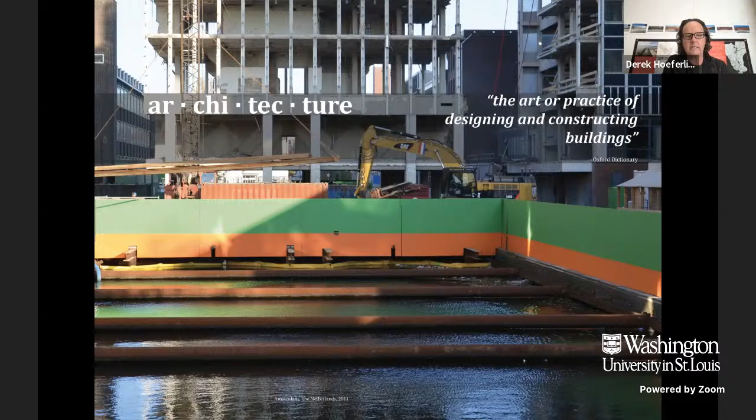Architecture itself, what I'm trained to practice legally to do, is the art or practice of designing and constructing buildings. But the double meaning of architecture, strangely and kind of insanely vague, is the complex or carefully designed structure of something.

This quote can almost seem like a threat to the discipline of architecture, but it really casts the net in a much broader way of what we think the term architecture means.

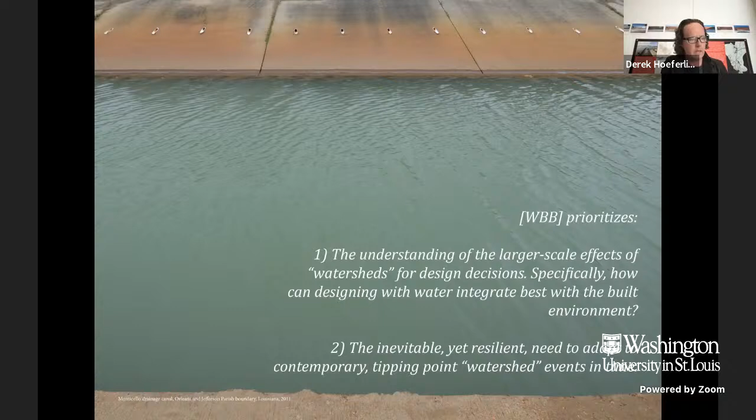So Way Beyond Bigness prioritizes the understanding of larger scale effects of watersheds for design decisions. Specifically, how can water integrate better with the built environment? And secondly, there's this inevitable yet resilient need to adapt to contemporary watershed events over time.

Way Beyond Bigness realigns both watersheds and architecture across multiple scales, from the site to the river basin, disciplines from ecologists to economists, narratives from the hyperbolic to the realistic, and venues from the academic to the professional.

Given our contemporary complex challenges, especially in relation to water, this cannot be done by one author or one architect. We need collaborations.

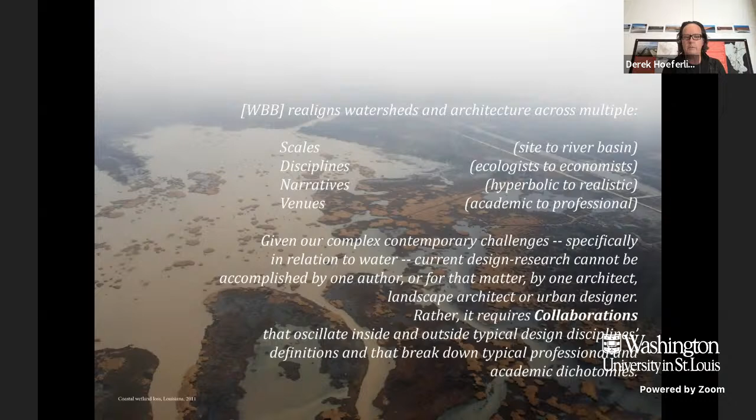I'm probably preaching to the choir, but these collaborations need to be different. They need to break down our typical professional and academic dichotomies, for instance.

But saying all this, a lot of the stuff I'll show today may come off as dire or pessimistic, kind of the world we live in right now, but it's really about opportunities and not crises.

We need to be much more proactive and not reactive. We need to think not just about what happens downstream, but where it comes from far upstream. And of course, still have to be pragmatic and hopefully optimistic.

So what I've developed in this book and in my research is a simple methodology, nothing unique, structured in three parts. The first is about analysis, but it's not just analysis, it's about appreciation. What does it mean to truly appreciate contexts and sites in different ways?

It's about synthesizing, but with synthesis comes the notion of speculation. That's where architects, landscape architects, and designers can cast a different way of thinking about things.

And when we collaborate, it's not just for the pursuit of collaboration or getting more grants. It's about catalyzing—how do we actually enact hopefully change, but maybe in different ways?

So the first part I'm going to talk about, which will be the majority of the work that I'll show you today, is this need for transboundary understandings—appreciating and analyzing.

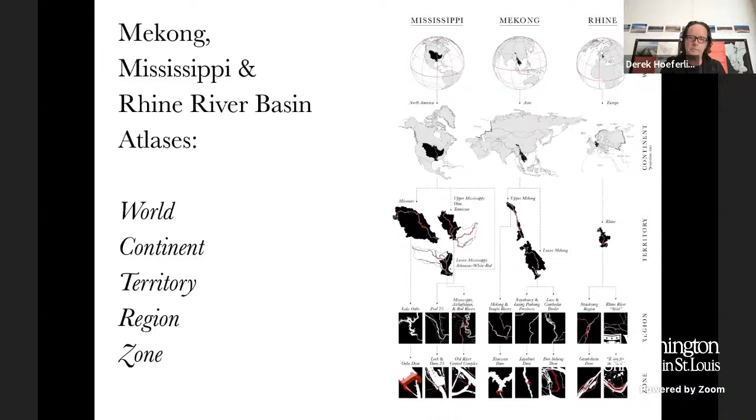So the first question is why—why these three river basins? I'm sure several of you have done deeper work than I have in these three river basins. But why the Mississippi, Mekong, and Rhine, other than personal reasons? The personal reason is that I live on the Mississippi.

I grew up here in St. Louis. I lived in New Orleans for a number of years. The Mekong, I love Southeast Asia, I love visiting there, I've been very fortunate to do so several times. And the Rhine, professionally, with my work in New Orleans, I worked with a lot of Dutch down there on water issues, so I have a lot of Dutch friends.

So those are the personal reasons, but the more questioning, research-oriented reasons—these are overly simplistic questions, maybe provocative—but you can make the argument that the Mississippi, because it's a 20th century engineered system, might be stagnating, both physically and possibly in other ways, socially and politically, if we go down that rabbit hole.

Accelerating: the Mekong is rapidly being developed, massive infrastructural projects, of course a huge amount of investment from countries upriver in the basin like China.

And then the Rhine, you could say, is adapting, or has been adapting, in terms of climate change policy, things happening especially in the Netherlands, but also upriver in Germany, France, and Switzerland. But those are maybe a little too simplistic.

The first thing you need to do when you look at this work, and what I've been doing, is understanding the management structures of each one of these. Obviously, all three have very different political structures, and they're managed differently. So these are, again, scale drawings of the three, the countries that happen within them, and what their management structures are in terms of river engineering and other types of watershed planning.

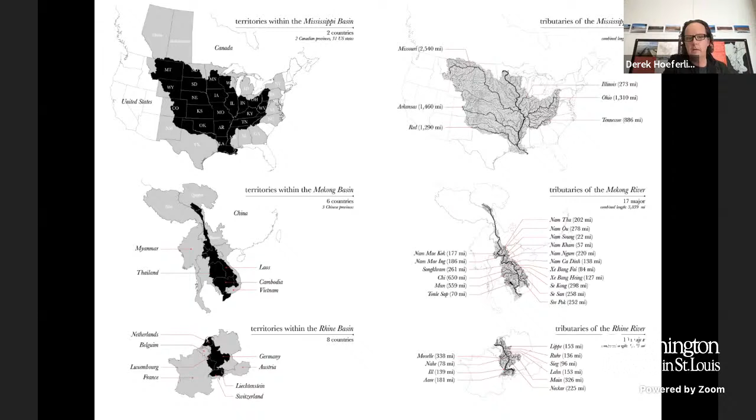And then I go into a series of comparative metrics that show, again scaled so you can see the difference, the territories of the three basins, the tributaries, water volume, and topographies. As you can see, the Mississippi, especially the main stem, is far less than the Rhine, but even more so the Mekong, which goes up into the foothills and the Himalayas and into Tibet.

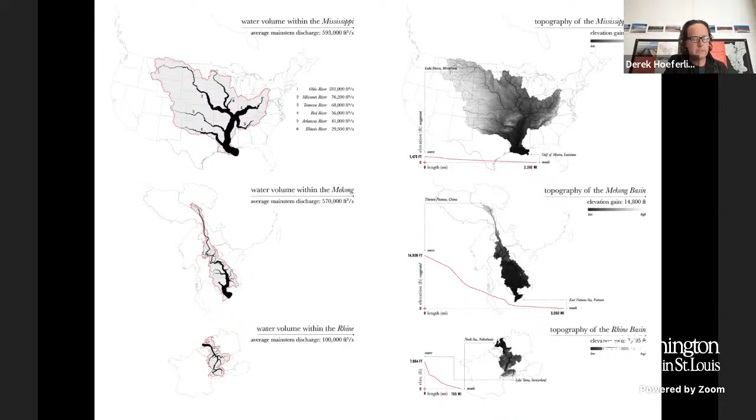So what I'm going to go deeper into today is one of the three. I typically talk about the Mississippi River Basin a lot—I don't want to say I'm getting tired of it, but usually the context of my talks is St. Louis or New Orleans or other parts of the watershed. But the Mekong is quite fascinating.

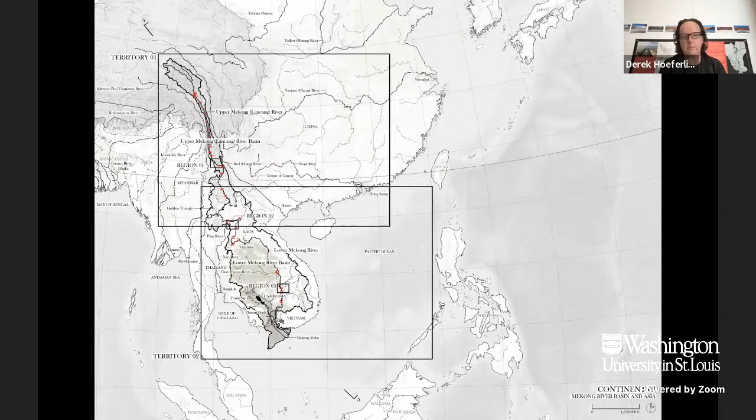So with those plan drawings, we've been constructing a series of correlating sections, and these are all orthographic drawings, which is a typical tool not just of architects drawing plans and sections of buildings, but also engineers. So this is maybe a critical way of looking at how we tend to draw these things.

So the point is that these rivers maybe aren't as river-like as we think, especially when drawn through an infrastructural lens. More specifically, these red cascading things you see are the dams that have been constructed, especially in China and Yunnan province, and the dashed ones are the planned ones. This is a big deal happening in the Mekong right now—serious ambitions for predominantly hydropower, but also water control.

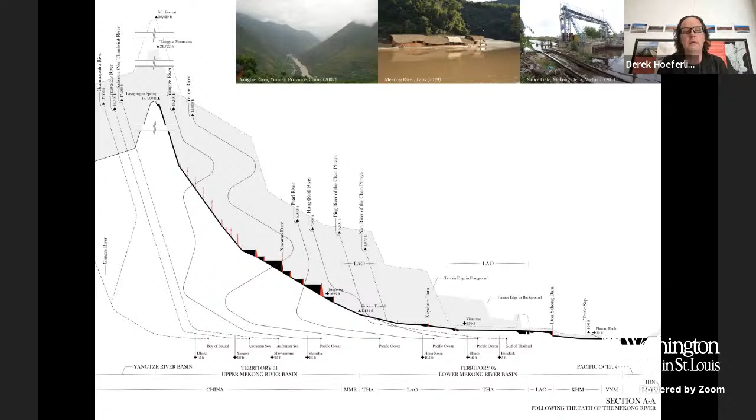And then the next scale in is the territory—so this is the upper Mekong River Basin. This photograph is at the Golden Triangle, where Myanmar, Laos, and Thailand come together. Here you can start to see more clearly where all the dams are located, the thinness of it, and this funneling of a vast amount of water, and how much power that can become for urbanized areas around it, which you might not be able to see.

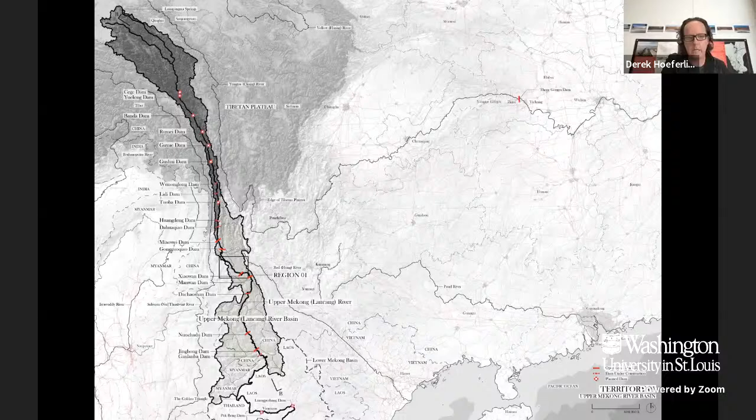There's a lot of really light red, delicate lines across this map—those are transmission lines, showing the beginning understanding of how these dams being constructed are designed to export power thousands of miles away to places like Guangdong province in China.

And then the next section through that—as you start to go in, you can see these red lines coming out of those dams, showing the names of the dams, the power, and where they're going—for instance, the West East Electricity Transfer Project, which gets this energy to large urbanized areas in China.

Moving into the next scale, the first territory is the region. This region specifically is where the Mekong and the Yangbi rivers come together towards another dam. This photograph is of Dali, up in Yunnan province, which technically is not in the Mekong River Basin, but there's a lake in the background of this photo, Erhai Lake, which is quite important—when you look at this plan, you can see these two rivers coming together down to the Xiaowan Dam.

As a result of these dams, as you all know, these giant reservoirs are created behind them, which do all sorts of things environmentally, ecologically, et cetera. But when the volume of water becomes so intense, that reservoir in the Yangbi River is actually backing all the way up, potentially even to Erhai Lake and Dali. So this backwater effect happening to very historic places like Dali could be transformative.

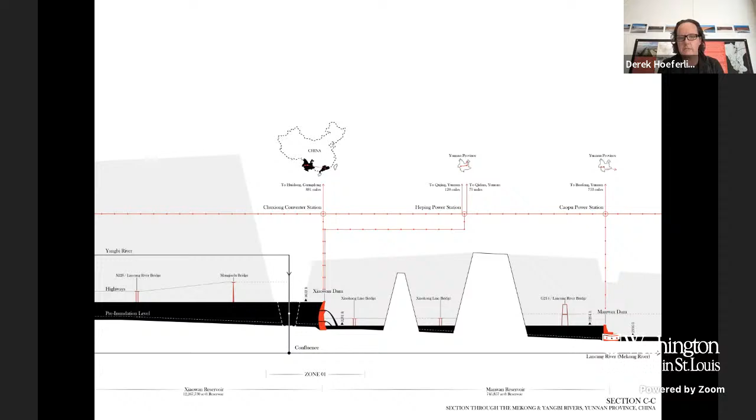And then where it's going out to, specifically which provinces it's heading out to. What's amazing is all this information is publicly available, which at first you think might not be, but this is all done from serious mining by my research assistants of GIS data sets and cross-referencing it.

So it's all there. This is the one photograph I did not get to take, so this is from International Rivers actually. I have not been able to make it up this far into China. It's quite intense to get to these parts.

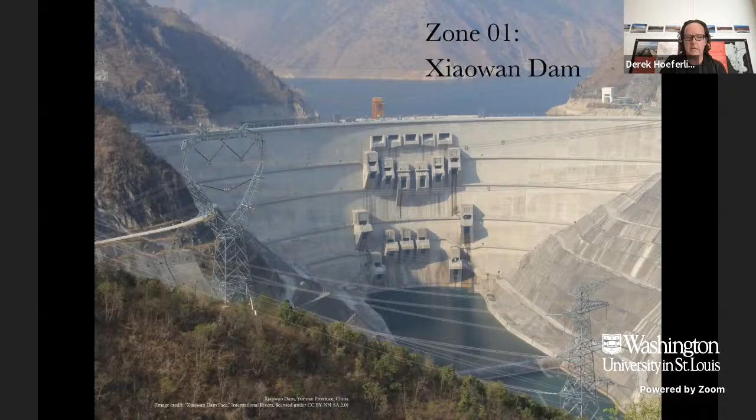So this is kind of what the scale of these dams are, and then here's the plan of it. When you zoom in more, you can see there's a white dashed double line - that's the former path of the Mekong. The black with the bathymetry underneath it shows the reservoir that's being created. The red curved line is the double arched curved construction of the dam, and then other things like the switching stations that are part of the power generation too.

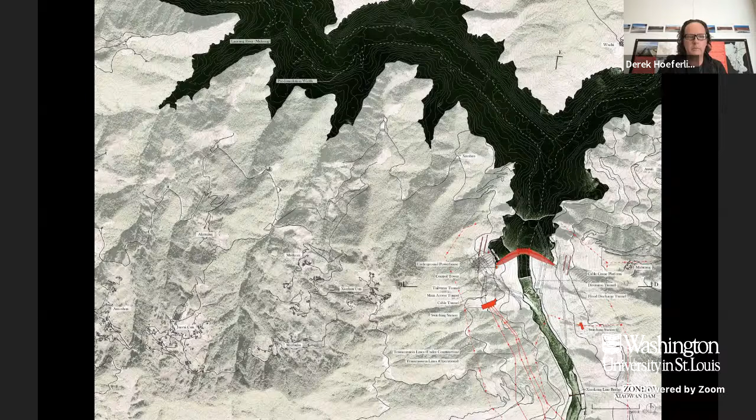These are two sections - one's cut looking back towards the dam of that photograph you just saw, and then even the transmission lines showing how that becomes a real new form of the built environment, just something we take for granted, power lines and transmission lines, but the feet to do those and how those alter the landscape, and then a cross section showing the reservoir.

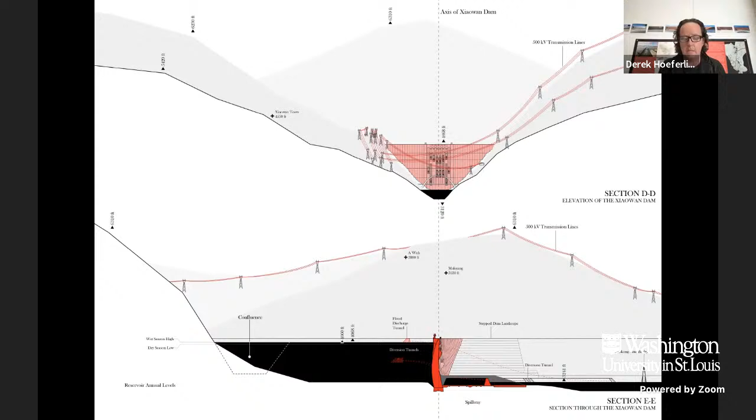And so just that giant step, maybe just in the simplest terms, the Mekong has completely changed for the foreseeable future. So that's the first territory.

The second one is moving into the lower Mekong Basin, where things radically change geographically, geomorphologically, climatically, et cetera. Then you can see in the icon the two smaller zones that we've been looking at.

Again, the very different context down in the bottom part - for those familiar, is the Tonle Sap Lake, the part in Cambodia where during seasonal dry and wet conditions, during the wetter times, the Mekong actually reverses its flow naturally and backs up and fills up this giant bladder, becoming one of the most important fisheries in the world. The jury's still out, but conventional wisdom is these large dams far upriver are completely altering that pulsing of water, threatening the future viability of not just the entire Mekong Delta, but the Tonle Sap region as well.

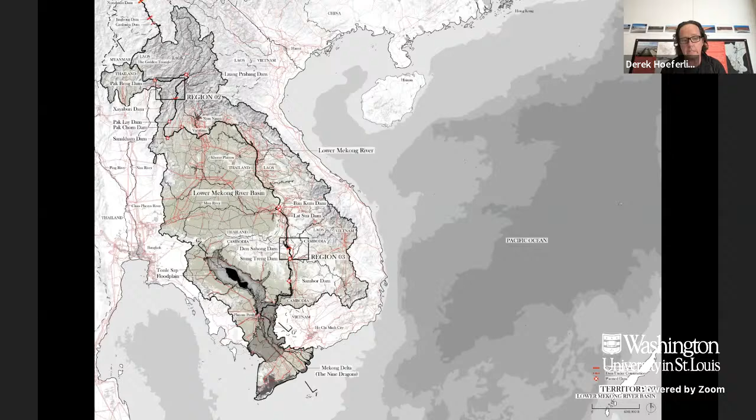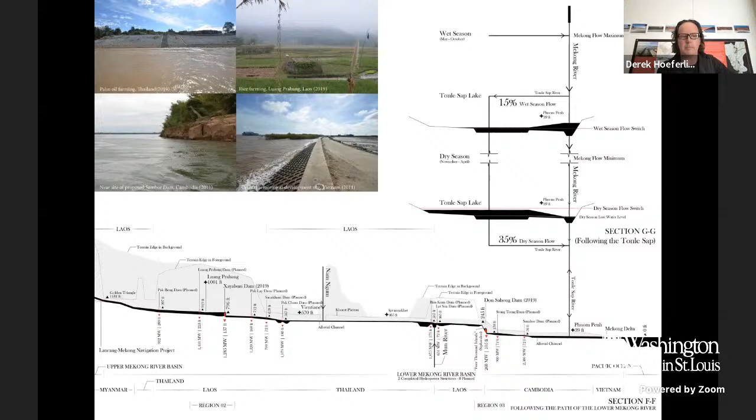The reservoir created by the already constructed Xayaburi Dam, the new roads, and then in the upper right is one of the relocated communities. So where the dam was, where the reservoir filled it up, there's been a state-funded program to relocate people.

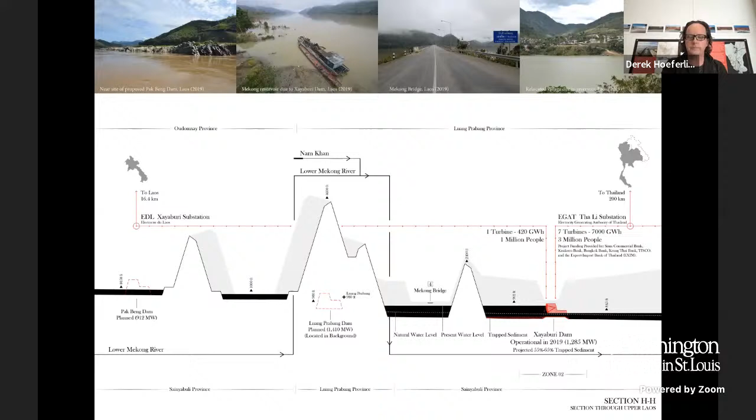What kind of social services and all that are part of it is a question. And then the section through those parts. And then this is the dam.

I was fortunate 2 years ago on one of my trips to be escorted by the Mekong River Commission and the Minister of Mines and Infrastructure from Laos to go to Xayaburi Dam. This is technically the only place you're allowed to take a photograph of it.

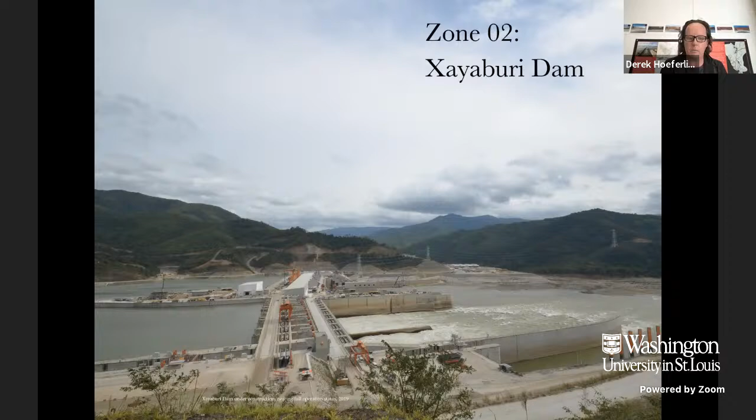This was before it became fully operational in 2019. So it's a run of the river dam. It's not nearly as big, of course, as the Cascade Dam, Xiaowan, but it's still drastic. It's the first main stem dam on the Mekong in Laos, at this lowest portion. So it was quite fascinating to be there while it was still under construction.

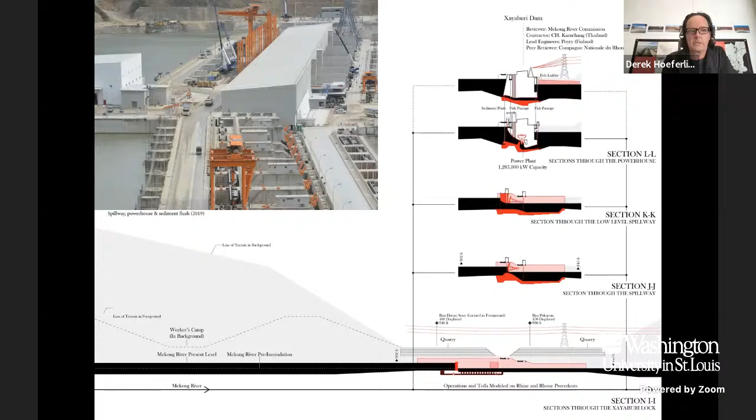But the Mekong River Commission went back and reviewed it, and they had to put a fish ladder and a sediment sluice back into the design and construction of these. The question is, there's never been a fish ladder or a sediment sluice that's been tested at the scale of what's going through the Mekong River, the amount of fish that are going through. This is not your salmon ladder up in the Columbia River in the Pacific Northwest. This is a gazillion amount of fish that are going up and down river. So the jury's out on whether these will even work.

But what's really special about this part of the Mekong River is this is where the remaining few dozen of the Irrawaddy dolphins are. If any of you know about the Irrawaddy dolphins, they're a dolphin that can live both in salt and fresh water. So this is thousands of miles upstream. There are these amazing dolphins. There used to be many, many thousands of them, but they were

eradicated by people like the Khmer Rouge. But so anyway, this is a very ecologically sensitive part of the river. And there's a dam that's finishing construction, the Don Sahong Dam, which is a kind of a diversion dam. So luckily they didn't kind of decapitate the whole part of the river right here.

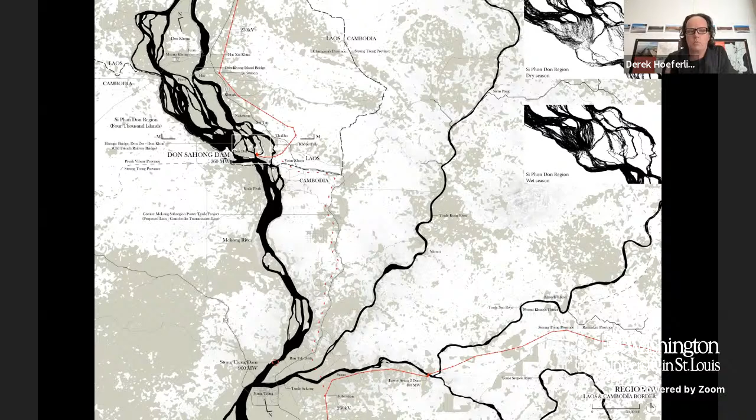But this is where all the higher part of the river comes through these series of cascading waterfalls. It's called the 4,000 Islands region, and then drops down. In the upper right, you can see what it's like in the dry season and in the wet season. So a radical pulsation of water comes through here.

Here you can see the photographs in the upper left. The middle photograph shows a tree. So this is when I was there during dry season. And you can see the roots that are just kind of pushed over, many, many years by the force of the river. The one on the left is a former river level gauge built out of stone in Cambodia that would have been built probably by the French.

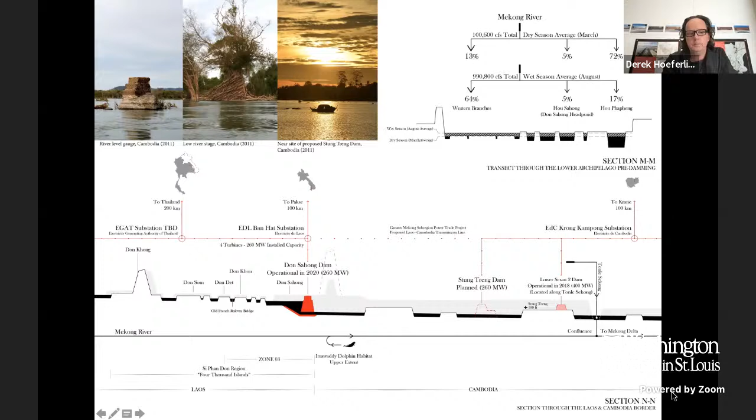And then the explanation of where that power is going, for instance, in Thailand. And this is a picture of that region and the low water level. So in the wet season, this right here, you'd be underwater. That's how much volume is ripping through this portion of the river.

And I really like this drawing because it just gives this kind of amazing braided view of this region. So the Mekong at this point is not just a river as we typically know it, but it just spreads out in so many directions. And the bottom part of the image is where it then spreads out and becomes the really big Mekong that we know. But on the right is where you can see the dam construction. So they've diverted it, and it's meant to take all this power.

Since I've been there, I haven't been there in over a decade, a lot of development has happened here. It's a bigger tourist destination, a lot of development pressure.

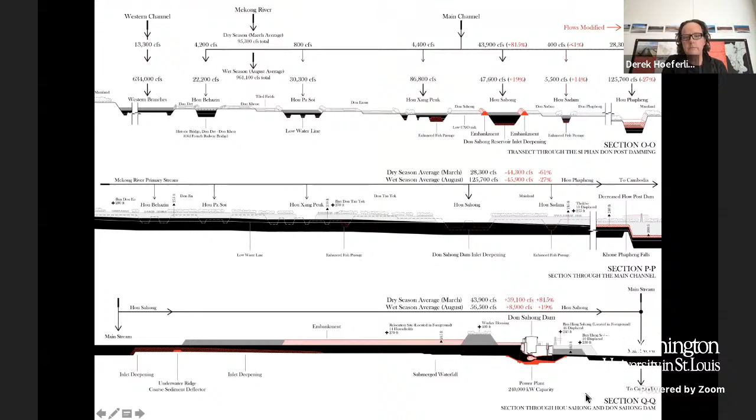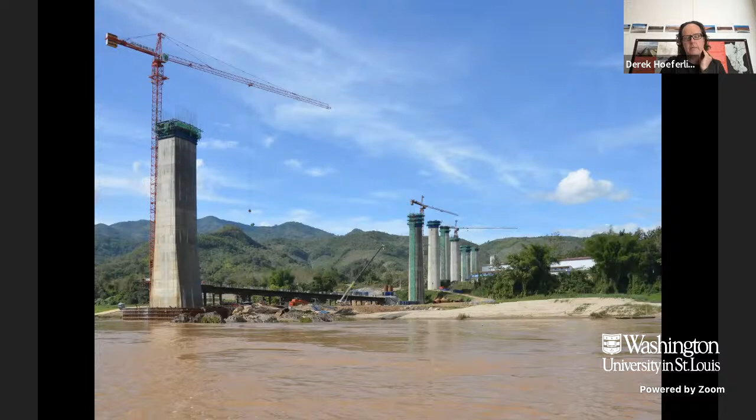This is a place called Las Vegas, a huge casino special economic zone at the Golden Triangle in Laos, on an island run by a Chinese company.

There's an essay that the members of the Mekong River Commission agreed to write, explaining the economic and environmental balancing act they have to do with the development of the Mekong.

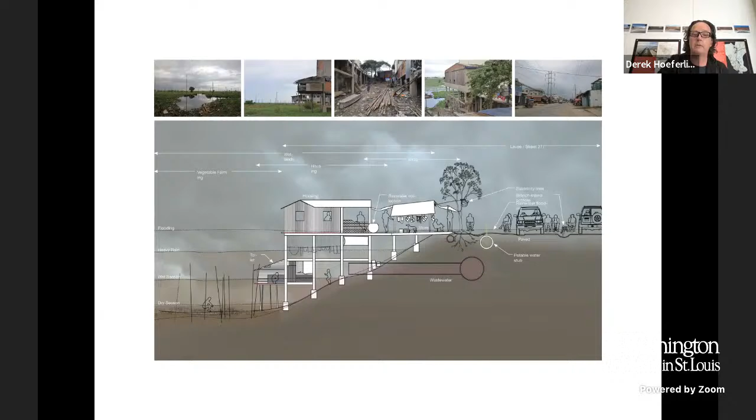And then one about adaptation by Shelby Doyle, who teaches at Iowa State, an architect, where she did a Fulbright studying things like the photograph I showed, how the vernacular architecture is doing a lot of these things, but they're at threat based on increased changes.

I was the person that helped me get through these trips, and I've met before, Dr. Duong Van Ni, an agricultural scientist at Can Tho University. He wrote an essay about his monitoring kits that he works with local farmers on, going out with low-tech instruments to test the saline levels.

These are drawings that we did of his work. My research assistants redrew the stuff that he did, tying in together his important work with our work.

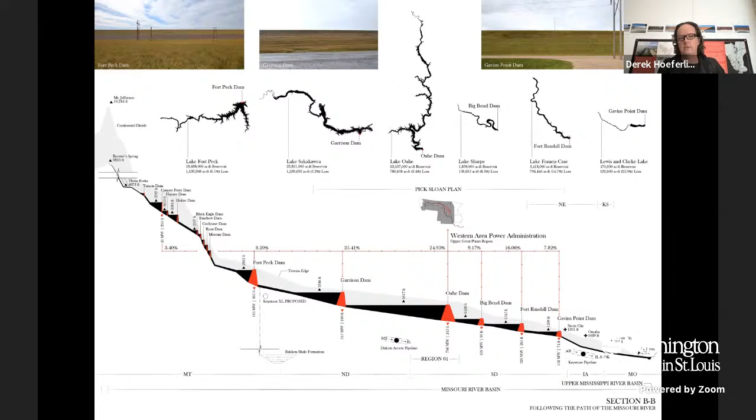And then real quickly, I'm going to show a couple images similarly of the Mississippi. This is the Missouri River Basin, which has those big dams, the Fort Peck Dam, and the massive hydropower project done last century with the Pick-Sloan plan, and the reservoirs created because of those. So you could say the Mekong is following in the footsteps of Missouri and Mississippi management, but here the inundation of lands were much more catastrophic for places like tribal reservations, for instance.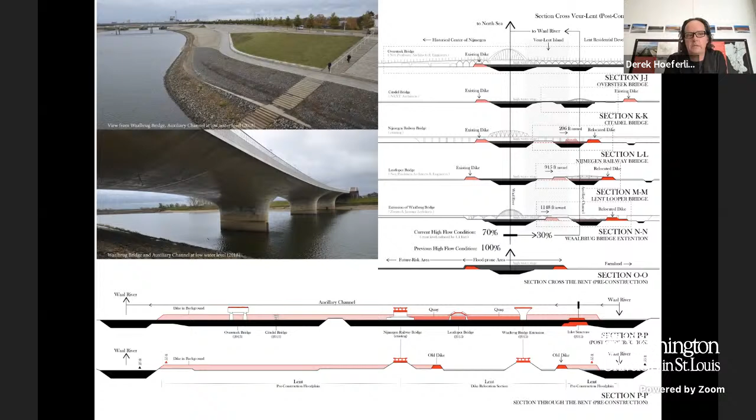And this is the town of Nijmegen at the German border, where they're doing these incredible projects, making bypass channels to allow floodwaters, but also to think about drought conditions too, making these much more publicly amenable spaces. So I'm going to wrap up with this portion of the talk, and then move into the current work in Colombia with the grant.

We got another 10 or 15 minutes, hopefully, for me to talk.

But there are clues with all this, and there are possibilities. This is me taking my students out several years ago in the backwaters of the Mississippi with my friend Chuck Theiling, who works for the Corps of Engineers.

There are clues to replenish, to redistribute, to reboot. So that gets into the speculation section, the need for transboundary watershed architecture.

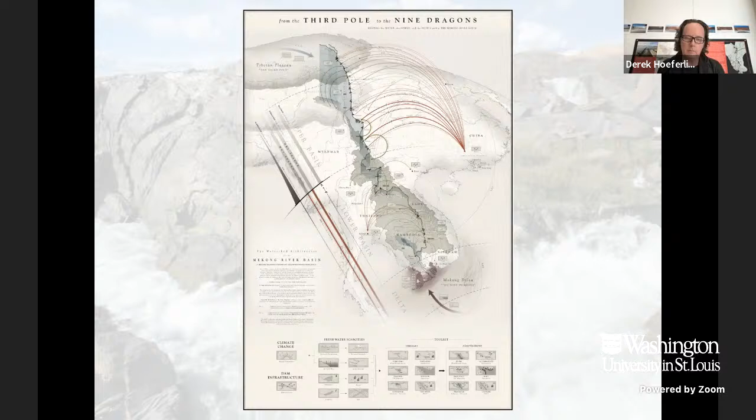So back to the Mekong, this was, Michael mentioned, a design competition I did a few years ago with Jess Vanacek and others. This was for asking about speculative ideas about dealing with water scarcity of all things, and it was a resiliency competition. So I thought this would be a great opportunity to do a speculation on what would it mean to think about a transboundary relationship of the Mekong in relation to power and water scarcity.

And so we did this really dynamic map that mapped out all the existing power generation and how it's being exported out primarily to China, but also showing the consequences of blocked fish migrations, disrupted flood cycles and drought cycles, suppressed sediments and nutrients.

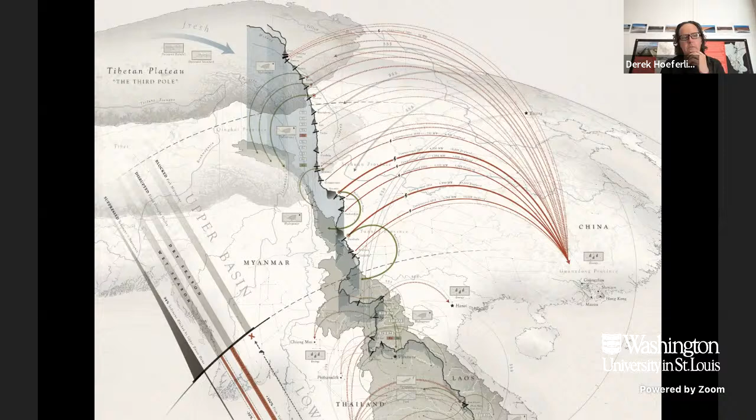And this is at the upper basin. And then this shows the lower basin.

We wrote a manifesto about transboundary resilience, but really it boiled down to the threats of climate change, coupled with the issues of dam infrastructure, creating freshwater scarcities, which brings threats, but then we need adaptations to those threats. I won't go much into detail given time, but it's basically about how do you work with the water and live with the water as opposed to fight it and control it.

Back in the Mississippi, a series of drawings I did with my colleague Ian Caine a number of years ago, where we were speculating on the future migration patterns of the United States and North America, specifically in relation to water. This bottom map is us speculating on where the water will be, and won't be in the American Southwest. There's going to be a lot of it here in our region, in the Mississippi and Missouri. However, it might be very mismanaged right now.

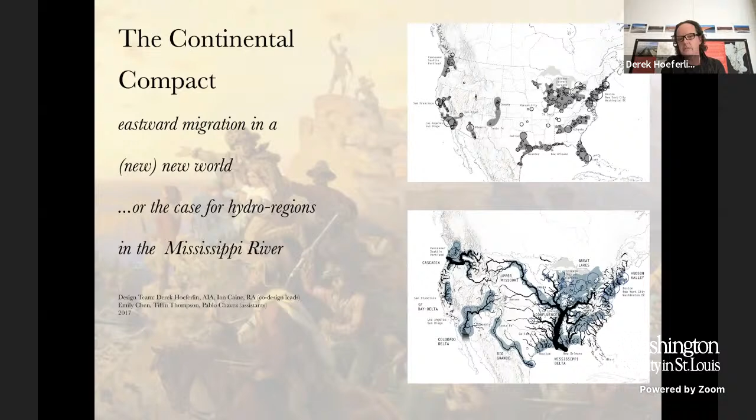There will be a lot of it. There will also be droughts too, but thinking about where's the future place to be, probably where the water is.

And then we proposed this idea of an eco-industry toolkit. There will be big industry in the future of the Mississippi. That's not going away anytime soon. Of course, we have big agriculture and big industry, but what does it mean to be much more sustainable?

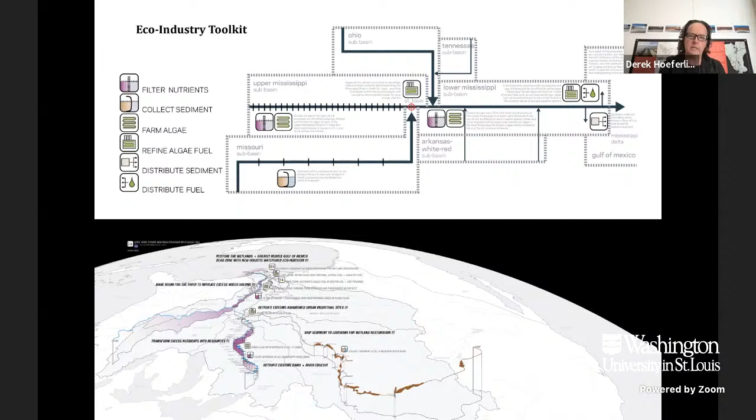How do you think about wastes as resources? Instead of nutrient overloads being negative, how can they become sequestered and used for things like algae or wetland sinks? What does it mean to rethink the distribution of sediment and allow it to replenish wetlands or be brought back to the Delta of Louisiana?

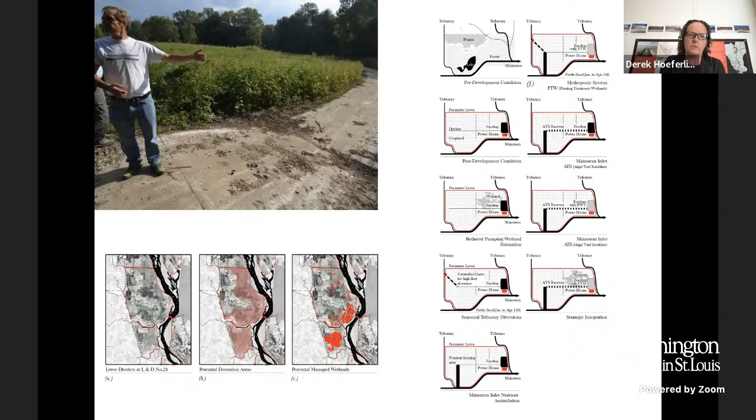And my friend Chuck Theiling with the Corps, I mentioned he's doing these things on a much more local scale, working with local farmers to turn back tiled farmland into nutrient sinks and even use algae mats and other things like that.

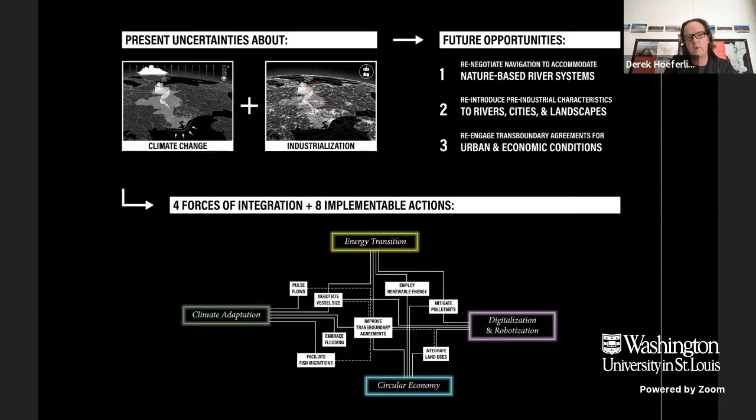We've done a speculation for the Rhine that talks about recentering the Rhine as a circular economy in the future for Europe. What does it mean for the energy transition, climate adaptation? And of course, this is very complicated given the current geopolitical context that not just the Rhine, but all of Europe finds itself in right now in terms of energy.

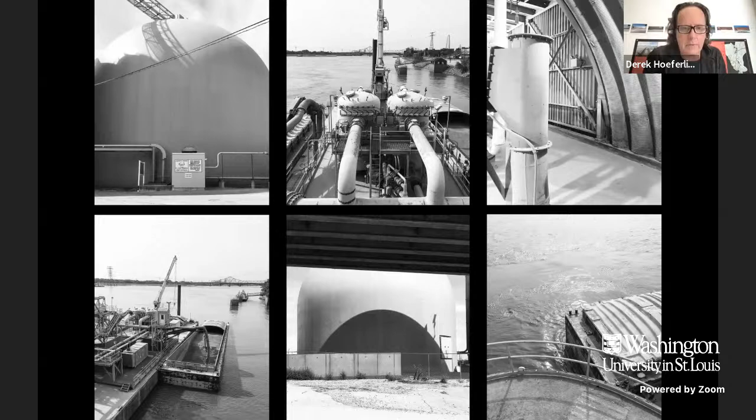So finally, Collaborate and Catalyze. I'm going to flip through this project really quick because I want to get to the Colombia project, but I did a project with students a couple of years ago on a barge. We were able to get access to Continental Cement Company, which is on the North Riverfront here in St. Louis.

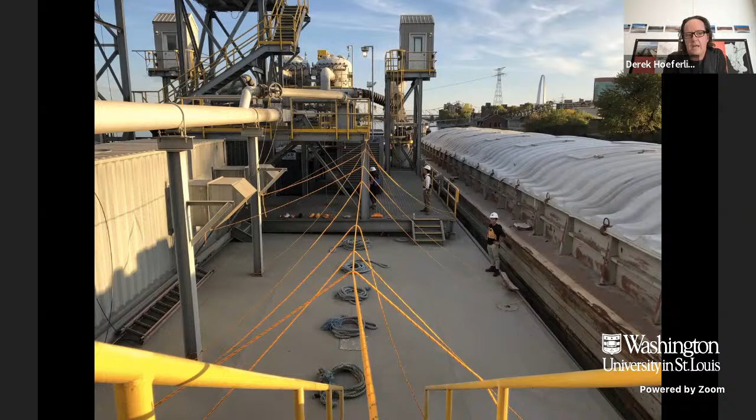And we put on a temporary installation where we thought about occupying places like barges. This is for cement transfer. We exhibited my drawings about barges on a barge. And then we held a quote-unquote afternoon symposium, but instead of being in a conference room or Zoom room, we did it out on a barge, and we brought many different voices and opinions about the future sustainability of the Mississippi. So juxtaposing these two things, being on a barge and being on a canoe, you can do both on the Mississippi.

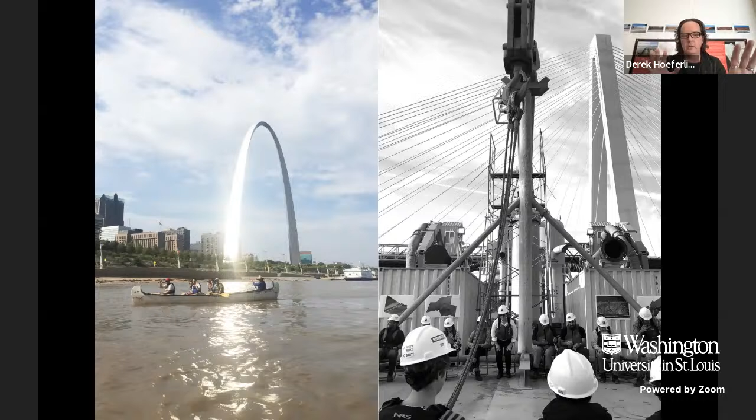So finally, I'll spend the last 10 minutes introducing this amazing project that is very much in process. I'm very honored to have met Jonathan Losos a couple of years ago, and he asked me to be a biodiversity fellow. If I wasn't listed as that, I would have never gotten to know Ivan Jimenez from the Missouri Botanical Garden, who reached out to me by finding my name on the Living Earth Collaborative website. So thank you for this.

Ivan and I successfully got a grant from the LEC last year. We were very ambitious at that time, thinking I would be traveling. Ivan's been there a number of times, but I was not able to get there until just a couple of weeks ago. It's also in collaboration with my students here at the Sam Fox School, both in landscape architecture and currently in architecture.

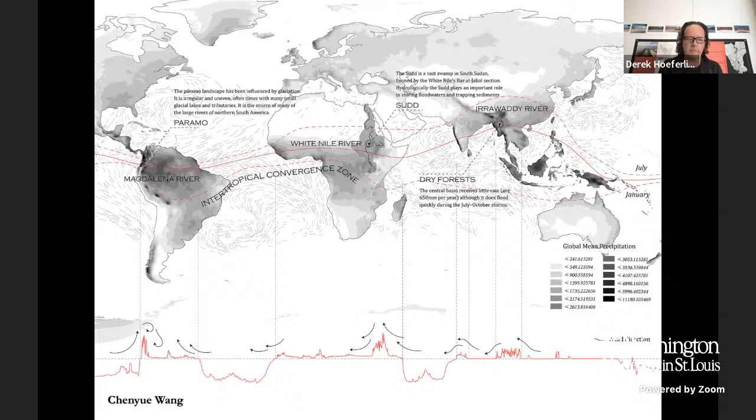So this is one of my students that was studying the Magdalena River and the Paramo in relation to other river basins, the Irrawaddy and the Nile, through the intertropical convergence zone. So we were studying loosely, but getting these students really learning about atmospheric rivers, and how at the bottom you can see a section that shows very simplistically the currents and the patterns of movement and how that affects the water distribution in a place like South America.

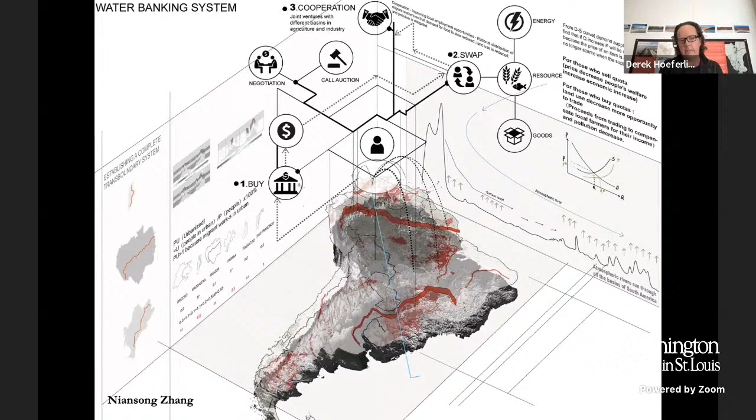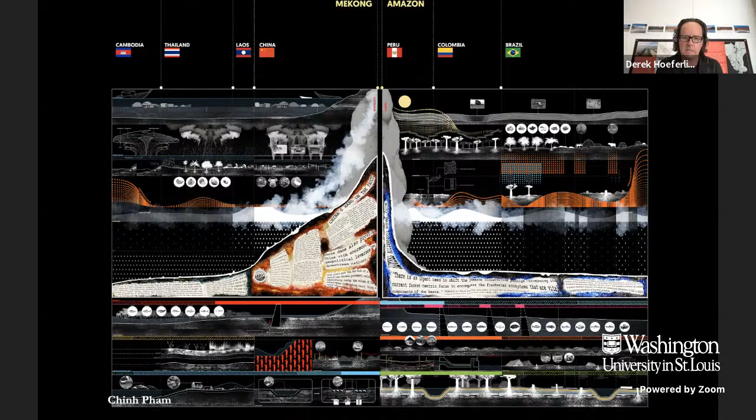This drawing's probably kind of wild to look at, but it's comparing the Amazon and the Mekong and the stresses in terms of things like deforestation, fires, and pollution.

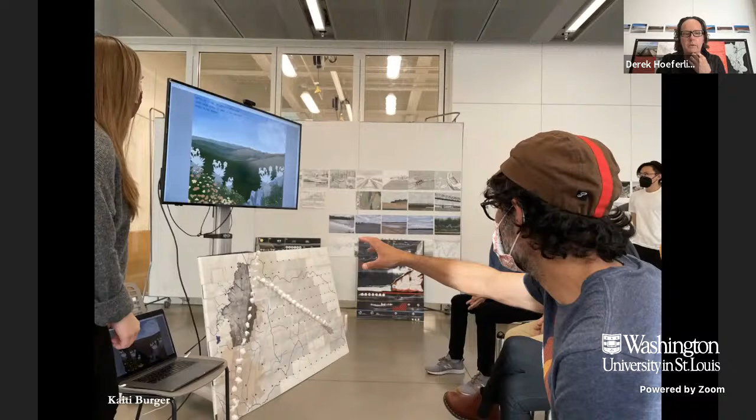And then we built, did drawings and built models. This was fun, kind of a classic example of the hybrid world we live in, at least last fall. So this is our students here in the Sam Fox School presenting to Don Moises, Erica, and Ivan in Colombia. We were having a review of those previous drawings that you just saw. This is Ivan back in St. Louis, looking at the work that we were doing.

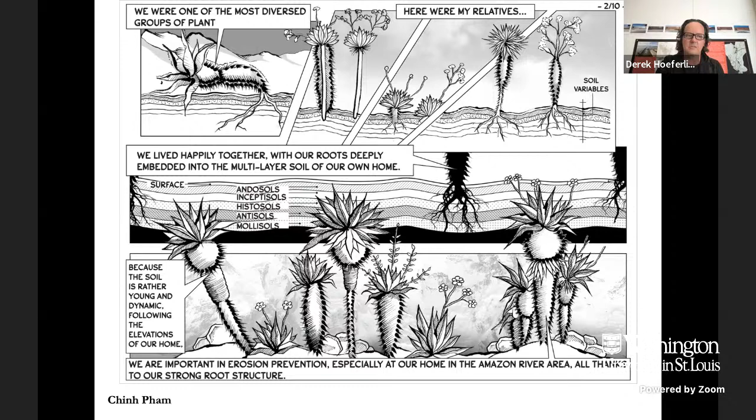And then Chinh took that, and I think this project was really interesting, very provocative and futuristic even. He tapped into this relationship and conflict between the cattle and the plant. That's what this drawing shows, the current condition of the land uses. And then on the right, what would a future coexistence mean of cattle and Espeletia, but maybe something radical would have to happen, such as a new biogas generation landscape that could even be operated by artificial intelligence.

And now I'm going probably totally sideways with this work, but I think we don't know what the future is in 2080. We don't know what it means for emissions control, we don't know who will be doing it, what will the labor be, who are the people that will be there.

And I think that's really starts to critically think about who are the communities, who are the partners, who are the local farmers, where will they be. This is an aerial view of it. And when you look at this, you're like, oh come on, this is crazy.

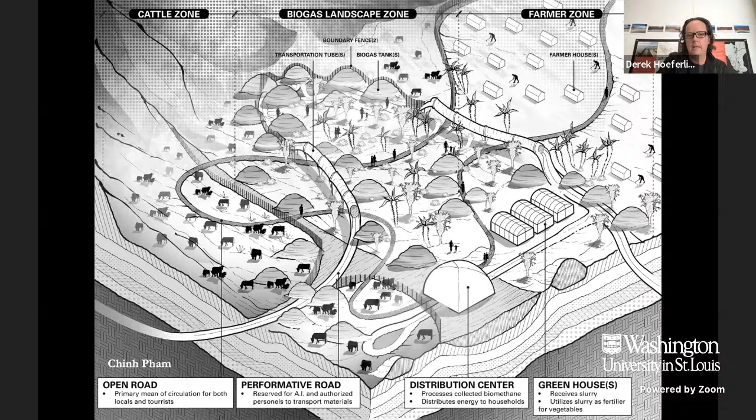So I find it very curious when we look at Chinh's project, maybe he's onto something, or maybe people are already onto something that we have to find different solutions.

And it was really cool. Chinh won an award by the American Society of Landscape Architects here, the St. Louis chapter. So it was recognized as being a very meritorious proposal. That was really nice, that the work from Colombia back home here in St. Louis has been recognized.

And this nursery, this Paramo nursery that Yvonne and Erica and others are working on, is for 4 things: research, of course, for the conservation of biodiversity, education, bringing students here. This is meant to be a working research project, not a tourist destination, for ecological restoration.

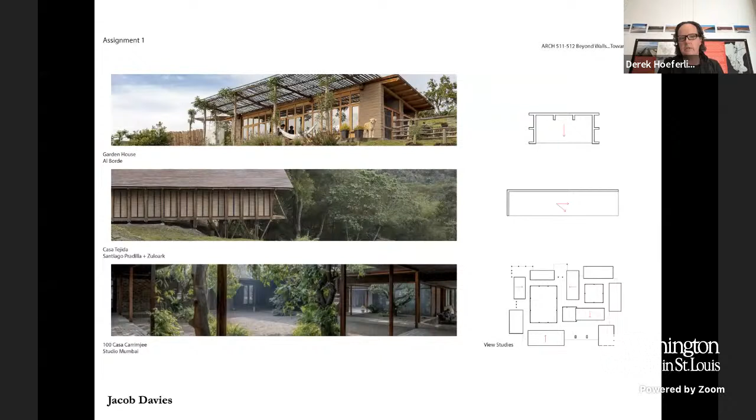So the ensemble, and I'm at 45 minutes here, I'm gonna wrap up, but there's 5 or 6 key things that we need to talk about and help design everything from structures to water management and pathways. The students have been looking at precedents around the world that can help inform us, thinking about ways of engaging the terrain in different ways.

Different types of construction that are much more sustainable than using concrete, for instance, using the stone that's readily available, using timber, which is readily available, but also new forms like rammed earth construction and not concrete.

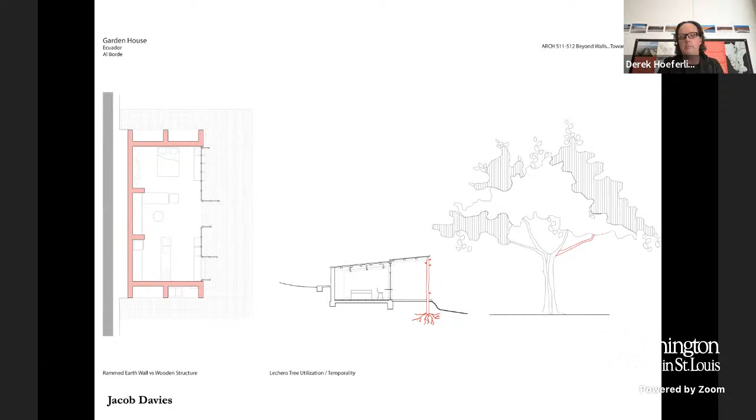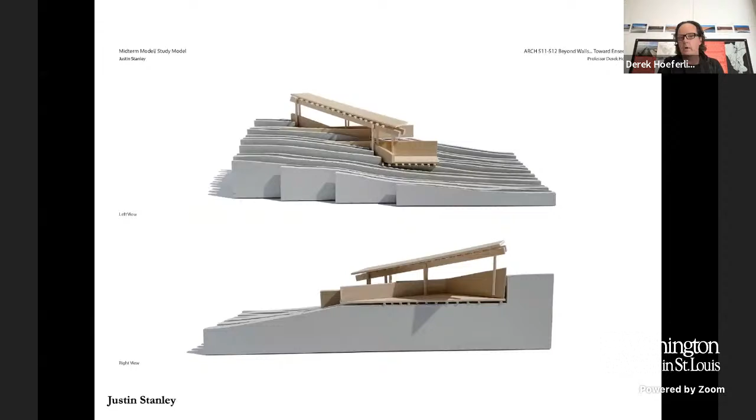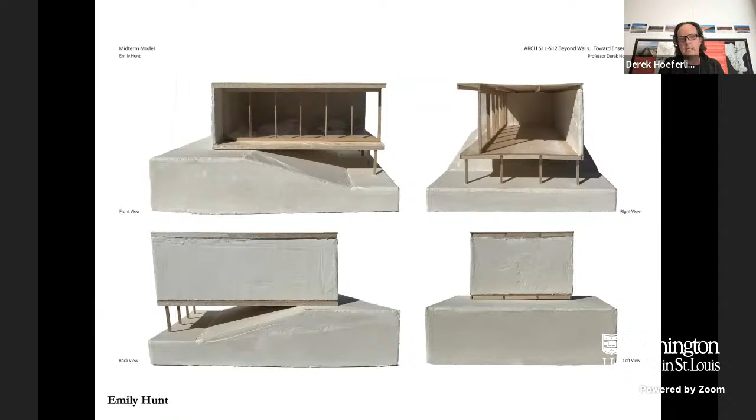We've been testing out conceptual models with water moving through the site, and what does it mean to put new structures in. We work a lot in physical forms. These are conceptual models that start to talk about ways of habitating the slope, models that take on ideas of studying rammed earth or the bahareque construction.

And then now we're getting into architectural proposals for new worker housing, new bedrooms, new research areas, and then reviewing the work. This is what we do in architecture school. This was just on Monday. We have a couple weeks left in the semester.

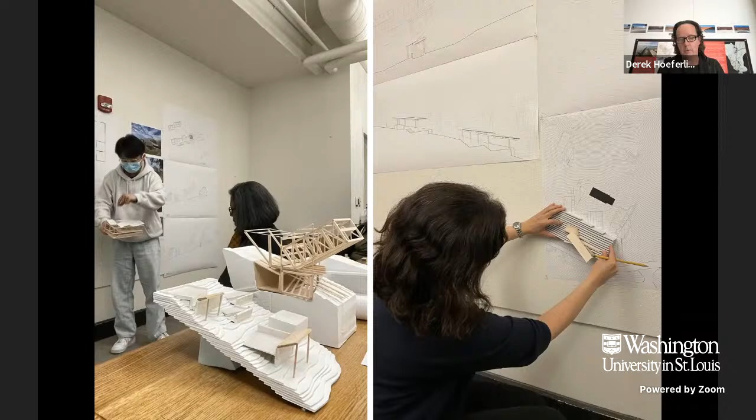We were very honored to have a world famous architect from Bangladesh, Marina Tabassum, join us on Monday, who does really compelling, beautiful vernacular-based work in her country.

Then I'll end with this. This is the team with Don Moises, Yvonne, and Erica in the national park. And I want to thank not just the Living Earth Collaborative, but of course the Sam Fox School here at WashU and the International Center for Energy, Environment and Sustainability, who has helped fund this work over a number of years.

So with that, I guess I will stop share and I can take some Q&A.

Awesome. Well, that was so interesting, Derek. While we wait for some questions to come in on the chat section, I want to start off with one.

Your work made me think about, in aquatic ecology and freshwater conservation, we often ask this kind of rhetorical question, which is, how wide is a river? It's a way of thinking not only about the ecological interactions happening within the aquatic realm, but also broadening the scope to consider things happening in the surrounding riparian areas and even further out. So I guess that's kind of a philosophical question. How do you approach that question of how wide is a river, from your architectural perspective?

Well, that's a great question, and I won't pretend that I know the scientific answer to that. But one thing, when I showed quickly that project I did in Columbus, Indiana, with the Mississippi watershed, where we built that kind of crazy scaled model, the question I asked then is, is the watershed even a watershed anymore? I think that's the first question.